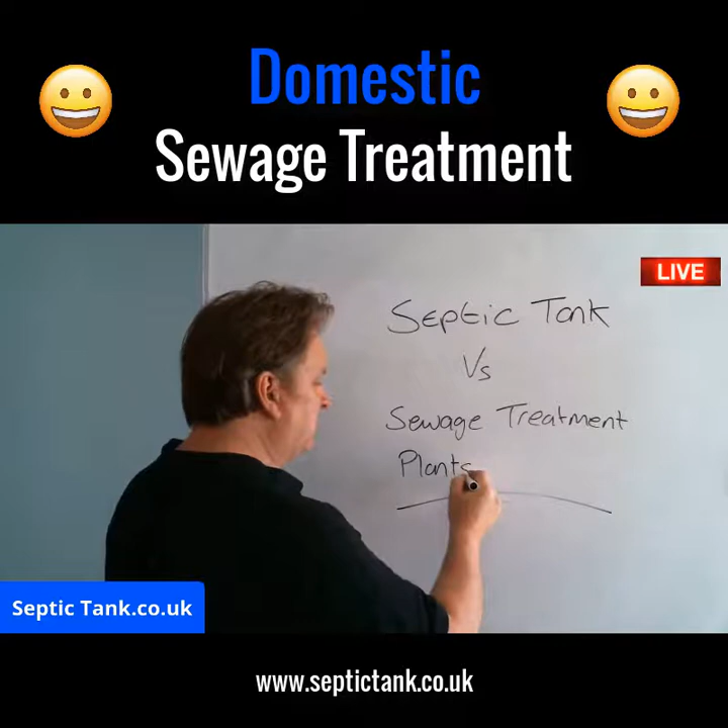Anyway, in this live broadcast today, I thought I'd just talk for a few minutes about septic tanks versus sewage treatment plants. So what's the difference between a septic tank and a sewage treatment plant? What's best, a septic tank or a sewage treatment plant? So I thought I'd just give a basic overall picture of the difference between the two and which is the best. So let me get my rubber here. Here we go.

God, it's hot outside today, I tell you. It's like 85 degrees. So I thought, flipping heck, I'm not going to go out there, mad dogs and Englishmen. So I thought I'd come in here today and, oh, it's cool in here, I tell you,

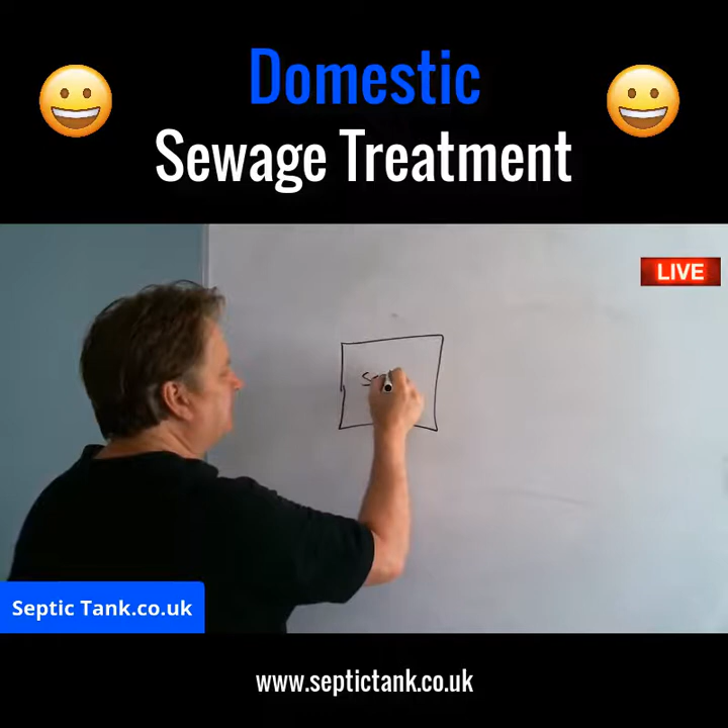but not that cool. Anyway, so let me show you the difference between a septic tank and a sewage treatment plant. So let's start with a septic tank. So let me draw a septic tank. So we'll call that septic tank. All right, it's pretty straightforward, isn't it? So we've got an inlet pipe going into it, and let me just do that a bit further down, and we've got a pipe going out of it.

All right, so let me give it some grass, not the stuff you smoke. Let me give it some green grass. Look at that. And I don't know if grass is any different color, is it? Well, actually, the grass outside is brown today because it's been so hot.

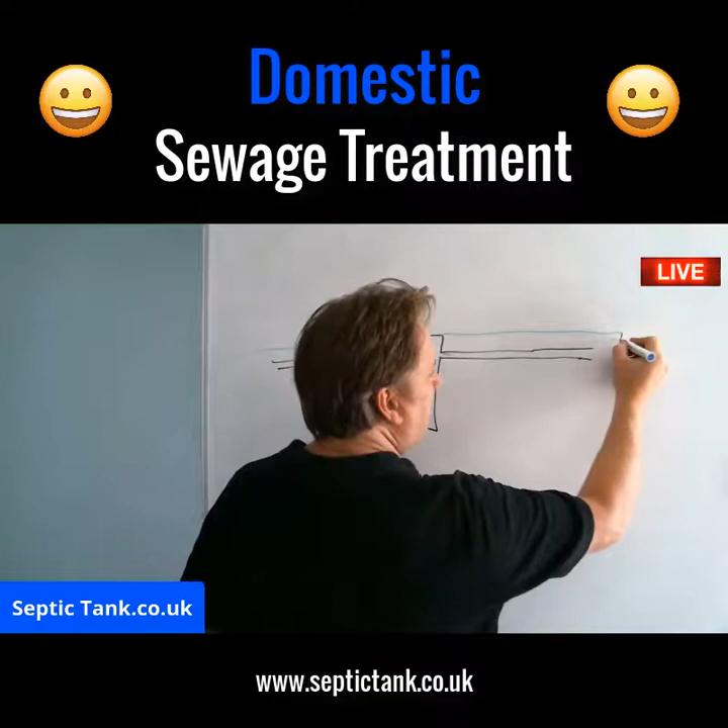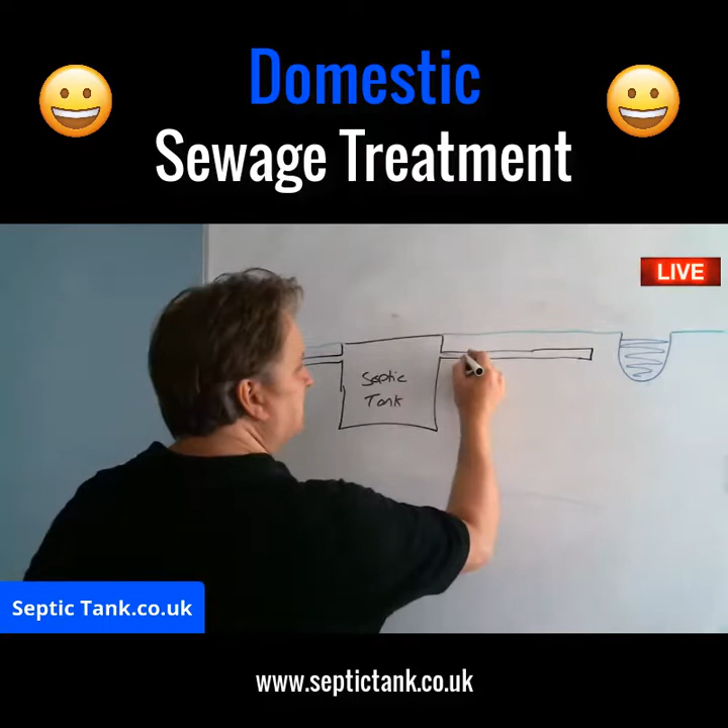But anyway, so here's a septic tank, and that's water. And I'll put that there. You'll see where I'm going with this in a minute. And I know, don't tell me you're amazed at my drawing skills. All right, so there's the septic tank. There's the soakaway. That's the soakaway. There you go. That's not too bad, is it? Okay, so

let me just quickly explain how a septic tank works. You've got raw sewage in the form of wastewater going into the septic tank, and then it fills the septic tank up. Then when it gets to this level here, the wastewater goes into the soakaway and then drains away into the soil. So that's how a septic tank works.

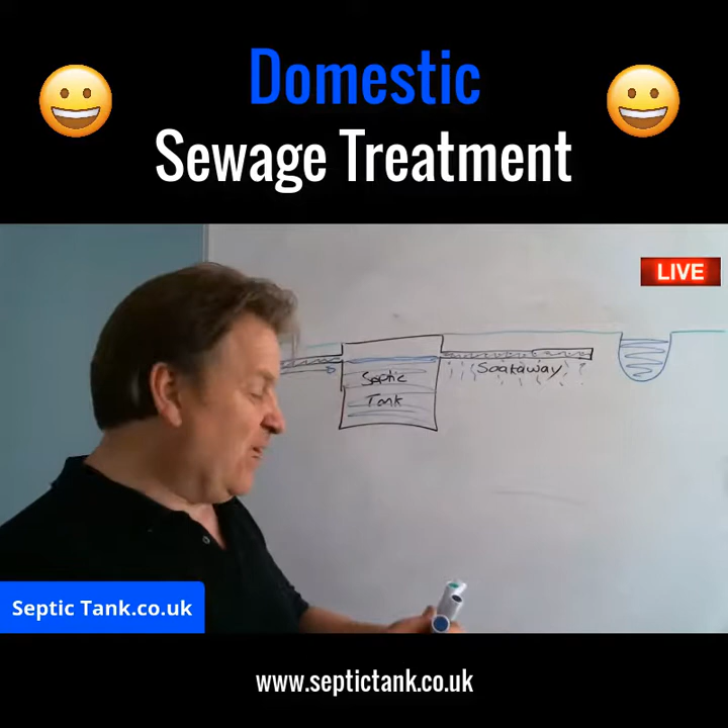The soakaway is probably the most important component of the septic tank, because if the water didn't soak away, the tank would just get full and then it would overflow and it would stink and back up to the house. So that's how a septic tank and soakaway work. I'll tell you a little bit more about this thing here in a minute.

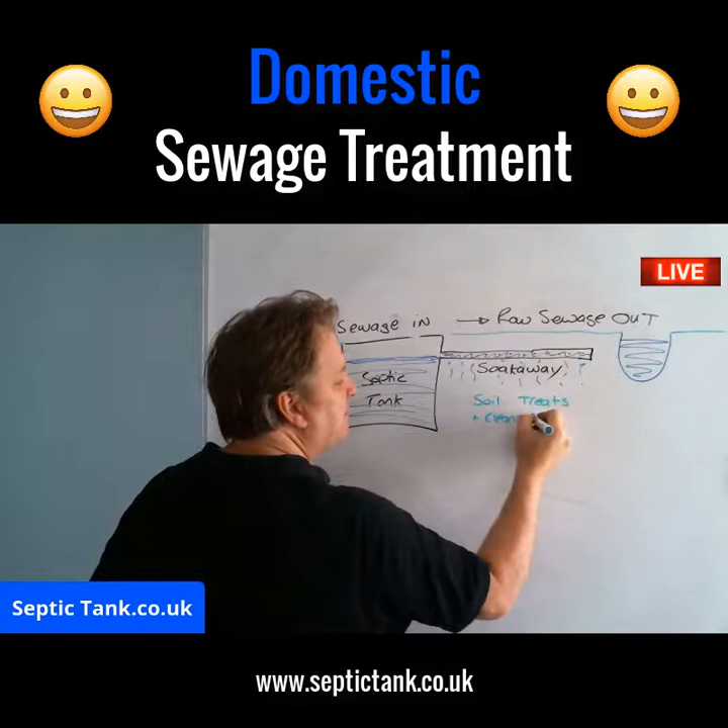So the basic difference is with a septic tank, you've got raw sewage going in and you've got raw sewage out. So that's basically it, right? Raw sewage goes in and raw sewage goes out, and the soil, in fact, let me change colors, hold on. So the soil treats and cleans the sewage. It's pretty straightforward, isn't it?

Okay, so that is number one. I'll put number one, septic tank. Okay, that's cool, isn't it? I got the right pens there. All right, so number two now. So now let me see how much space I've got there. I keep looking back because I've got a monitor there. It tells me if I go out of the area.

So now I'm going to do a sewage treatment plant. Again, we've got pretty much the same scenario here. We've got a pipe coming in. But I'm going to give the sewage treatment plant a different colour because they're normally green for some reason. Don't ask me why, but they are. And let's give you a typical shape of a sewage treatment plant. I know that looks like something out of Close Encounters of the Third Kind, but it's not meant to be. That's what some of them look like.

So you've got your pipe in, you've got your pipe out. Now here's the grass. You've got a green lid because it blends in with the grass. So how much have I got there for water? Yeah, I've just got enough.

That's water in there. And is that on the screen? Yes, okay, so that's on the screen. So, okay, we'll call that outlet pipe.

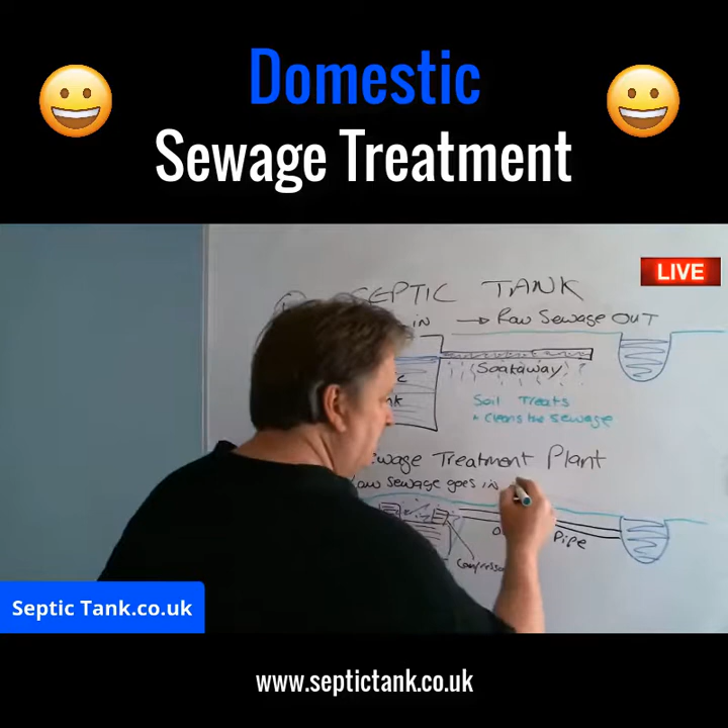Give the bacteria and the microbes in there loads of energy, right? And those bacteria and the microbes, they eat all the bad stuff in the sewage. So they eat the sewage. So raw sewage goes in, but clean water comes out. And so here's the outlet pipe. So the clean water can come out of there and go into a watercourse, like a river, a stream, a brook, a ditch, whatever you've got there.

So essentially, right, if I just do a dividing line, right, that's the difference between a septic tank and a sewage treatment plant. All right, so that's how they work. That's cool, isn't it? That's really cool how they work, right? So now I've shown you how they work.

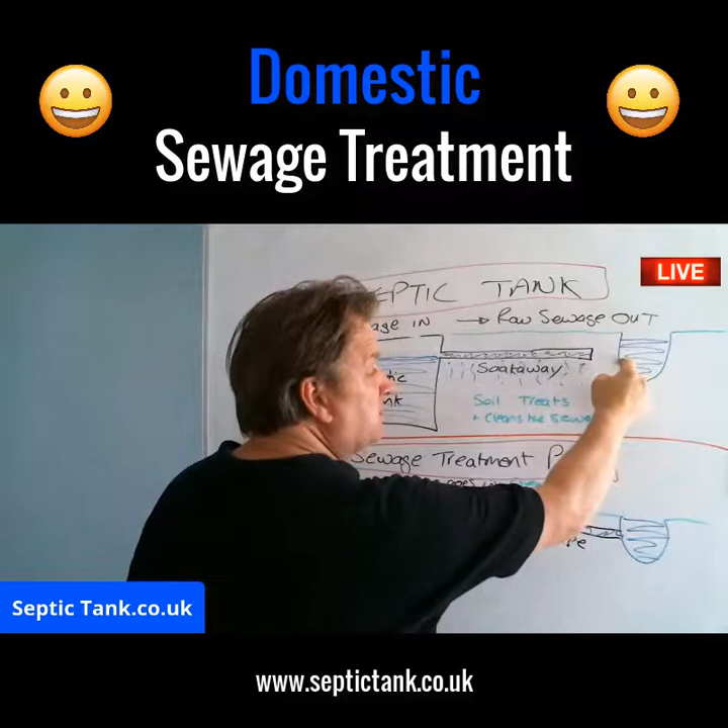What's the best, a septic tank or a sewage treatment plant? Well, it depends on the situation you find yourself in. Okay, so let me give you 2 classic examples. On the 1st of January 2020, all the rules and regulations in this country regarding septic tanks are changing. So if your septic tank, and many of them do, discharges into a watercourse or is close to a watercourse, this will become illegal on the 1st of January 2020.

Okay, so many people will have to replace their septic tank in favor of a sewage treatment plant, because remember, raw sewage goes into a septic tank and raw sewage comes out. And you have to wait for the soil to treat and clean that sewage. So it has to go through the land and through the fields, and eventually it makes its way into streams and rivers, but it's been treated and cleaned. So the land treats all the horrible stuff in sewage, right? So it's a long drawn out process as it filters through the soil.

With a sewage treatment plant, as I said, you've got compressors and motors and pulleys and belts and shafts and cogs and motors and electricity and pipes and wires. Yes, it uses electricity, and yes, they are expensive to run every year, but they turn that raw sewage into clean water, and that clean water can then discharge directly into a watercourse.

So if you live near a watercourse, then obviously you'd go for a sewage treatment plant, because you're not endangering the life of your family, you're not polluting the environment or doing anything crazy like that. Okay, so that would be the sewage system of choice. So that's basically the difference between the two.

However, if you don't live by a watercourse, and you don't live by a river or stream, say the stream's, I don't know, half a mile away, quarter of a mile away, then this is overkill, right? You don't need one of these, because it's like you can have a tractor, can't you? You could take the kids to school in a tractor. They'd really love going to school in a tractor, but it's overkill. You just need a normal car, or a 4x4, something like that, to take the kids to school. A tractor is unnecessary.

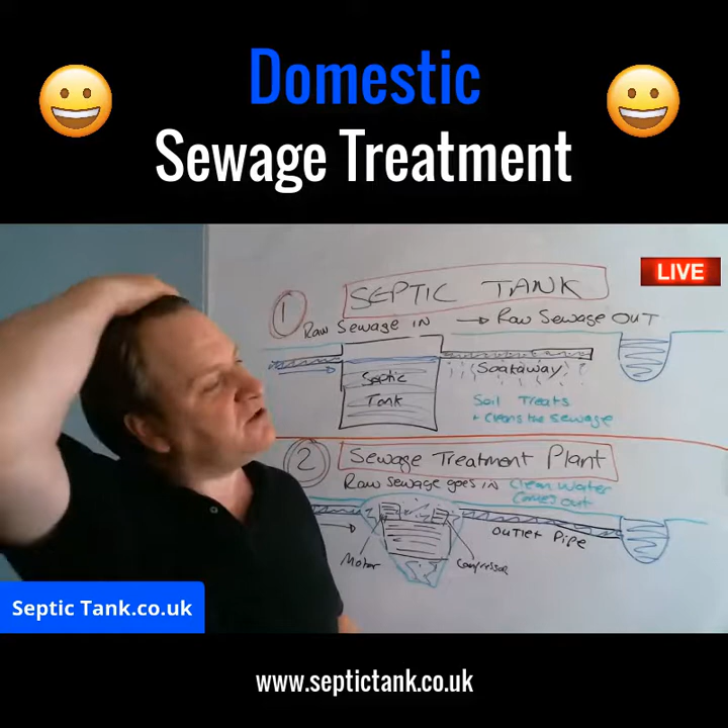Now, I just want to throw a curveball into the mix. Many people are being quoted 15, 20, 30,000 quid to replace their septic tank and soakaway if they live near a watercourse in favour of a sewage treatment plant. Now, how much do these sewage treatment plants cost? Well, they can be quite cheap if you've got a 1 or 2 bedroom house, but once you start getting onto a 3 to 4 bedroom house, once you start incorporating 5, 6, 7, 8, 9 people, some of these biodigesters, you can be looking at paying 15 to 25 grand easy.

So how much does a septic tank and a soakaway cost? Well, I sell septic tank and soakaway kits on my site, and they're 1,499, so they're like 13,000, 23,000 quid cheaper than that. So there's a hell of a price difference between the two, to be honest.

Not that I'm demonizing sewage treatment plants, because they're very good in certain circumstances, but I just want to give you a little tip now. So if you've got a septic tank and a soakaway that's near a watercourse, you don't necessarily have to replace it for a 15 to 20,000 quid system. All you need to do is this. Let's say this pipe here was discharging into the watercourse. And yes, I know it's going to be illegal, but this is all you need to do.

All you need to do is put in something called a septic tank converter. They're a non-electric unit. They're a little black unit like this. They're non-electrical. They're government approved. All the raw sewage goes into it, like that, and clean, beautiful water comes out of it.

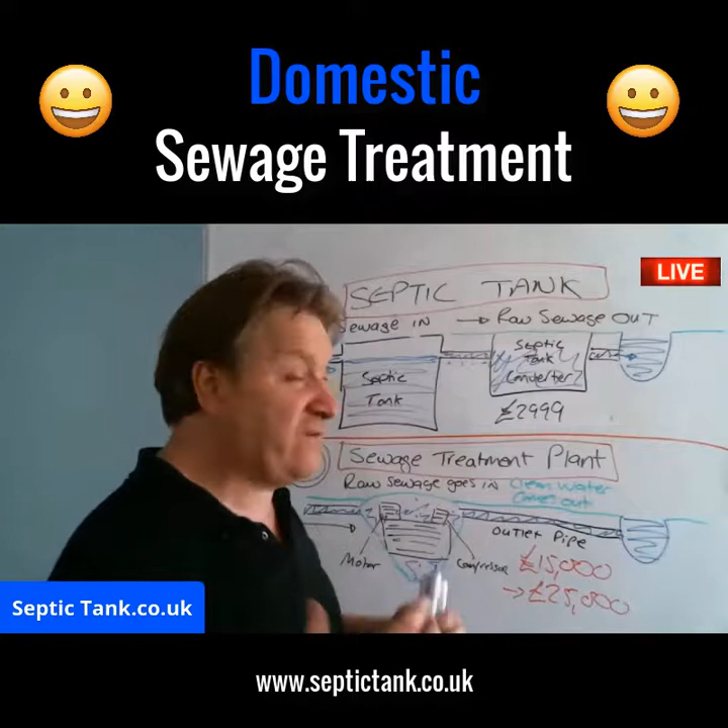They work on venturi suction, so they suck air in and exhale air, and the bacteria in there eat and treat everything, converting it into safe, clean, organic waste water. They're amazing. So given the choice between spending 15 to 25 to 30 grand on an electric system that breaks down after the year's warranty is over, and having to spend 1,000 to 1,500 quid a year on electricity costs, and 300 quid a year getting them serviced, for me, these are becoming like old dinosaurs.

I'm not demonizing electric sewage treatment plants. I'm just saying they're old technology. New technology is moving on, and the government are approving non-electric systems now that don't break down and will clean your water. They'll protect your family. They'll stop pollution and protect the environment.

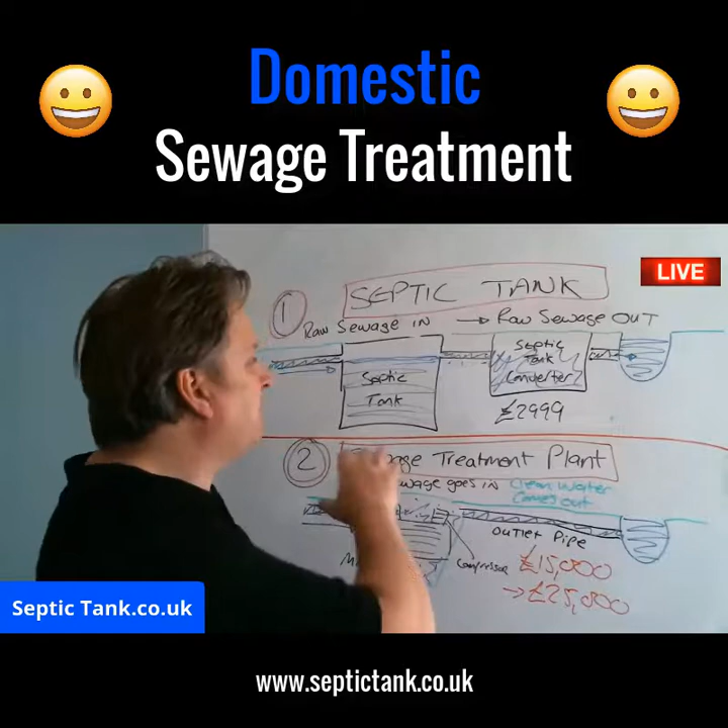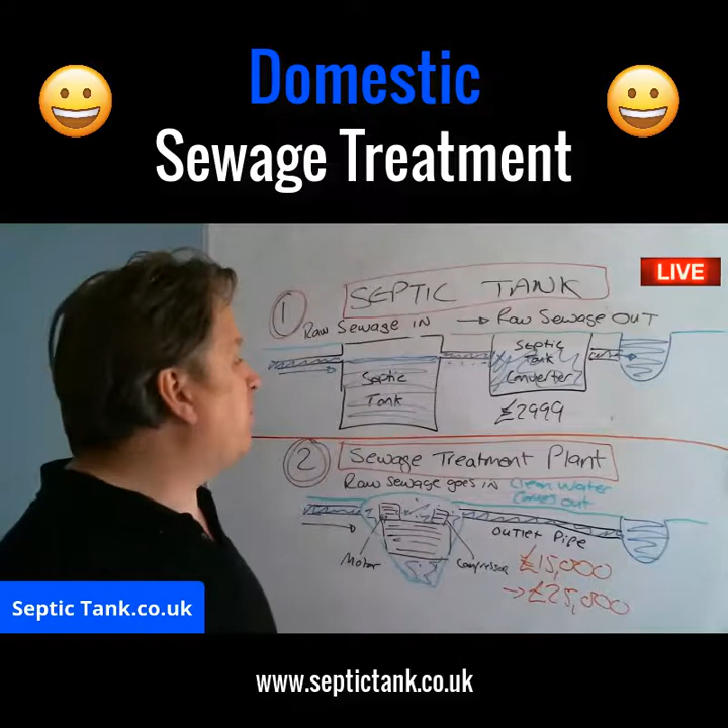So for me, if there's no watercourse about, I'll put a septic tank and soakaway in any day, because there's no maintenance of them, especially if you put some of the septic tank soakaway worms in that we do. And worst case scenario, to make my septic tank fully legal in lieu of the new septic tank rules and regulations that come into force, I just put a septic tank converter in, save myself 15, 20 grand, easy. So there you go. That's the difference between a septic tank and a domestic sewage treatment plant.